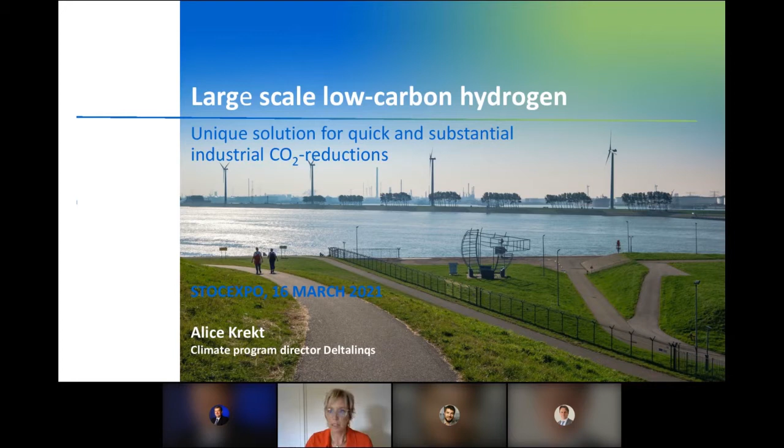So let's start my presentation, because the Dutch government, I'm sure you're aware of that, is very ambitious when it comes to achieving the climate goals. And what you see here in this slide is what we need to do. The aim is to decrease the CO2 emissions, but we need to decrease them quick. And therefore we have this H-Vision project. You can decrease CO2 emissions by making more renewables, but in the short term, it will not decrease the emissions so quickly.

Maybe just to step up to the question that was made in the previous speech. You have, of course, renewable hydrogen made from wind energy, for instance, it's an ideal situation, or solar developed electricity. You can make from water H2 and O2, so you then have very clean hydrogen, no CO2 emissions, at least at the production site. But you can also make hydrogen another way, and that is the way that we want to produce it. And we call it blue hydrogen.

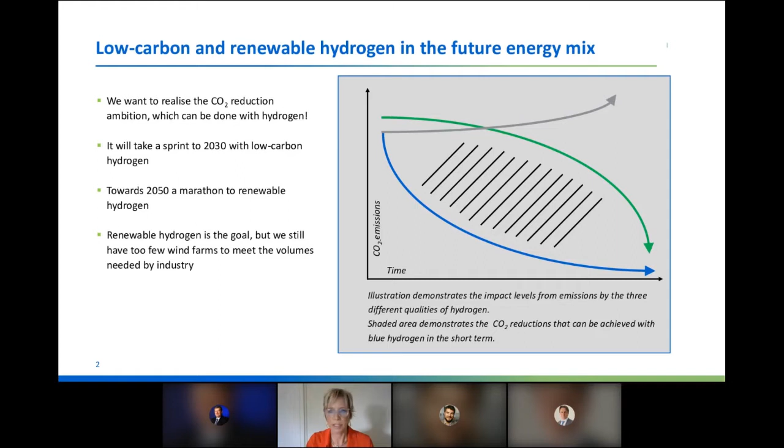You see here a blue line, and we think with this blue hydrogen, you can more quickly decrease the CO2 emission. I don't know if my pointer can be seen, but you see the lines here; this prevents a sort of bathtub of CO2 emissions that will still be emitted if you use the green line and slowly decrease the CO2 emissions. So that's why we have this project in the Port of Rotterdam, and I will explain quickly about it, and later on Marcel van der Kar will explain his interest from the Vopak side, because it's also of big relevance to the transport sector, or to the storage sector.

Here you see a picture that was already presented in a more beautiful way by the previous speaker, so I can be brief about this. But we think hydrogen will be of major importance for the European economy and the European industry, and all these purposes were explained earlier on.

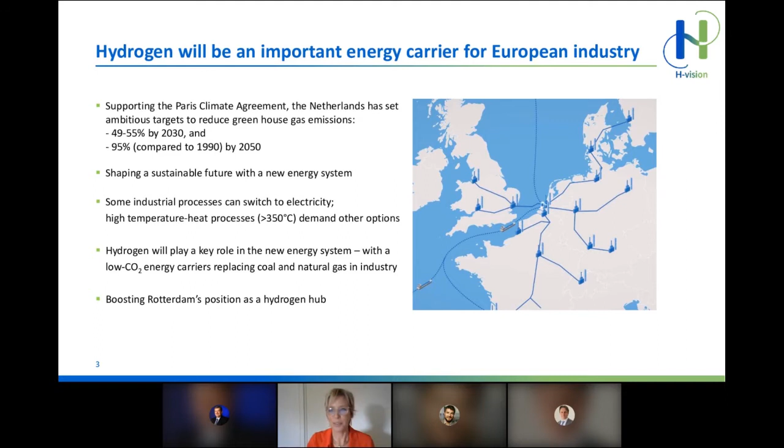But maybe one thing to say, for the Port of Rotterdam, to be more specific: we calculated that now about 0.4 million tons of hydrogen is used, mostly in the refineries as feedstock, but we think it will be 50 times more in the Port of Rotterdam area, because we want to import it and use it in all these several ways. So we are really focusing on it very enthusiastically, so to say, because we also see it as an opportunity.

We have a short movie that will explain very well, I think, what the project is about. So I hope that the organization can start this movie.

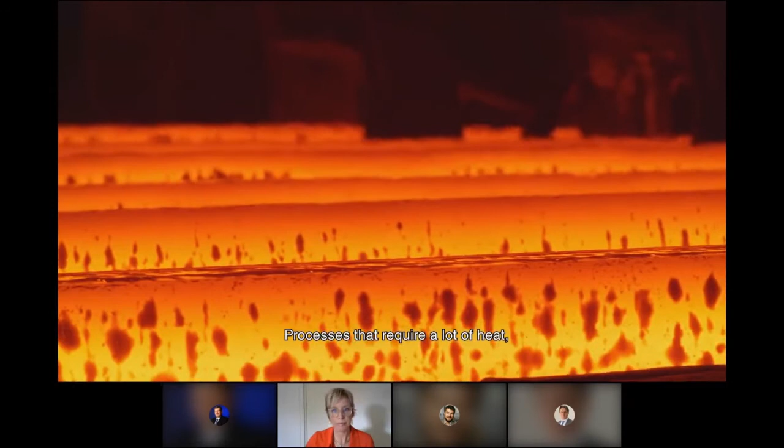In order to comply with the terms of the Paris Climate Agreement, the industry in the Netherlands wants to significantly reduce its CO2 emissions. Processes that require a lot of heat will have to switch from fossil fuels to hydrogen. This means that in order to achieve the climate goals by 2030, large quantities of hydrogen will be needed in the short term. This is possible with H-Vision. H-Vision has designed a unique and distinctive process in which hydrogen is primarily produced from refinery waste gases. This works as follows.

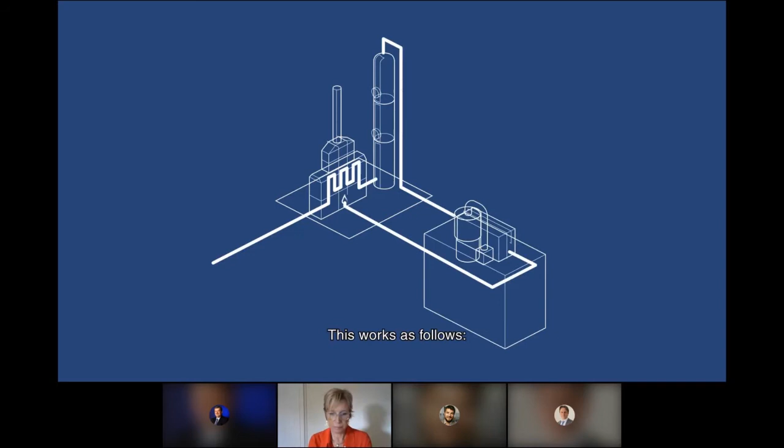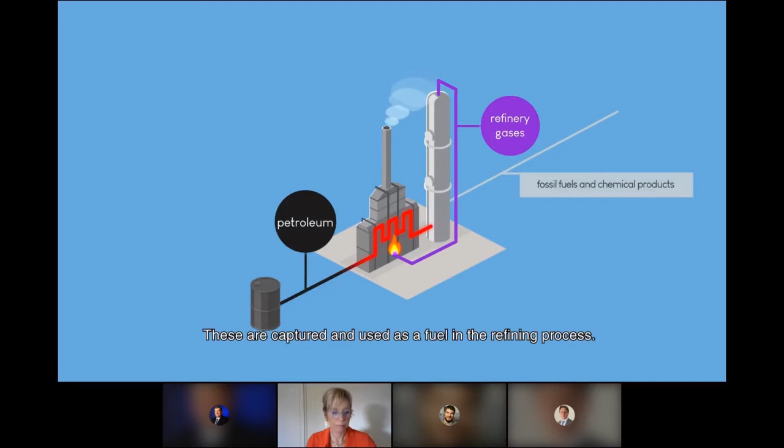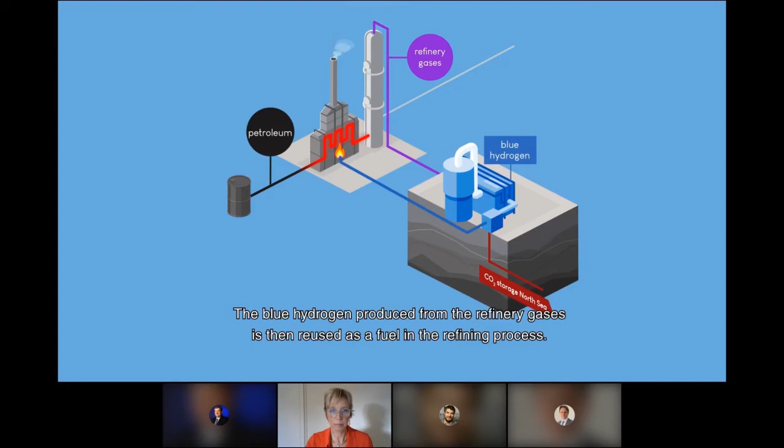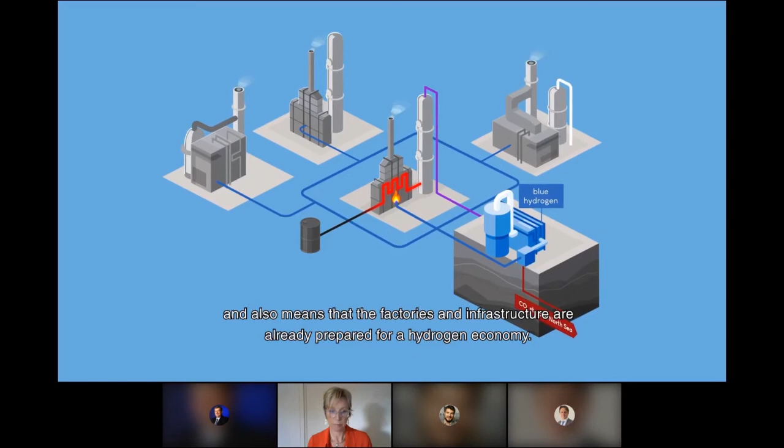Gases are released during the refining of oil. These are captured and used as a fuel in the refining process. CO2 is released when these gases are burnt. H-Vision transports these refinery gases to a central location where they're used to manufacture hydrogen. The CO2 released during that process is captured and transported to depleted gas fields under the North Sea. The blue hydrogen produced from the refinery gases is then reused as a fuel in the refining process. This significantly reduces the CO2 emissions from the refineries affiliated to H-Vision, and also means that the factories and infrastructure are already prepared for a hydrogen economy.

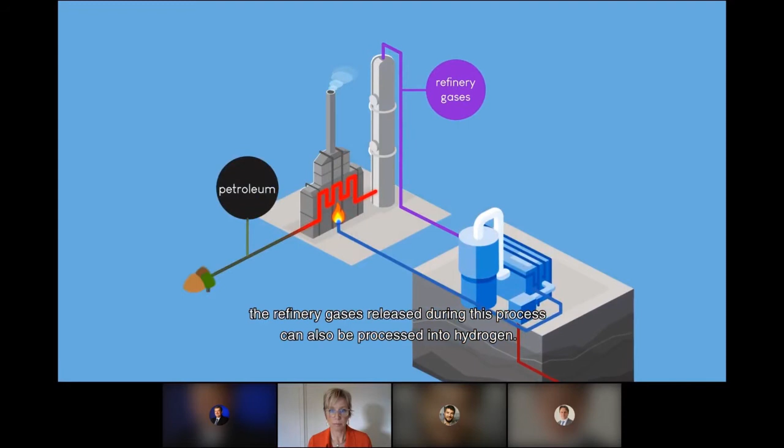H-Vision's hydrogen production is based on proven technology and can therefore be scaled up to an industrial scale and deployed in the short term. In the longer term, H-Vision will continue to contribute to a climate-neutral energy system. H-Vision is ready for the fuels and raw materials transition in the chemical industry. If the sector switches from petroleum to biogenic raw materials, the refinery gases released during this process can also be processed into hydrogen. In fact, this would even lead to net negative emissions in the production process. Once the use of green hydrogen has expanded, H-Vision can be deployed to make up for wind power shortages during periods where there is less wind.

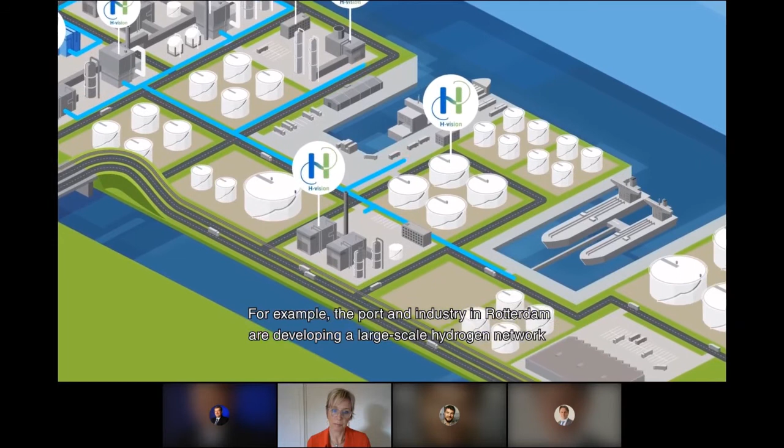The development of a hydrogen system is a joint task, both in the Netherlands and in Europe. A large number of partners in the hydrogen value chain have joined forces in H-Vision to initiate this process, but there is always room for even more customers. H-Vision partners also collaborate on a wider scale. For example, the port and industry in Rotterdam are developing a large-scale hydrogen network throughout the port complex, and H-Vision is preparing to connect to the national hydrogen backbone. This will transform Rotterdam into an international hub for other countries in northwestern Europe. H-Vision will ensure that the industry can quickly achieve the climate goals.

So I think an image, or a movie, can say more than 1,000 words. You can look at the movie later if you want to, but this explains a lot. It looks very simple if you look at this movie, but there are some challenges that we face before we can execute the project and start with the building of the factory. I will dive into some of the details.

First, maybe it is important to say that we have a large group of companies and organizations through the whole chain of hydrogen development connected to our project. Port of Rotterdam, you see, is important because they have the land position in the port of Rotterdam. Gasunie does the transport of natural gas in the Netherlands, but also the 3 refineries, because we want to start with the refineries as a kickstarter for this project. Of course, the transport and storage sector in Vopak. So there are a lot of organizations involved, and of course, we try to keep all these interests that organizations have, and also the economic challenges that they face when you develop this.

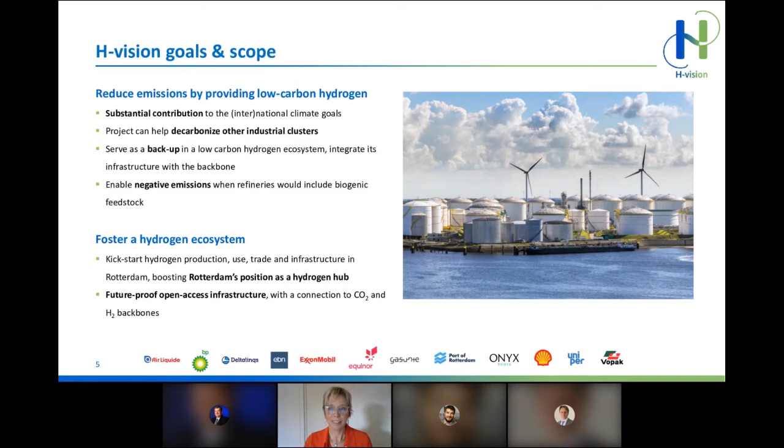We try to combine this into the project. Maybe just more detail about the technique, because it's a proven technology, but there's one very special thing about it: we use refinery fuel gas that's emitted from the refineries. Of course, they have a sort of leftover which they now use as a fuel. We will use it to produce the hydrogen, and that is important. In that sense, you make it almost like a sort of circular project.

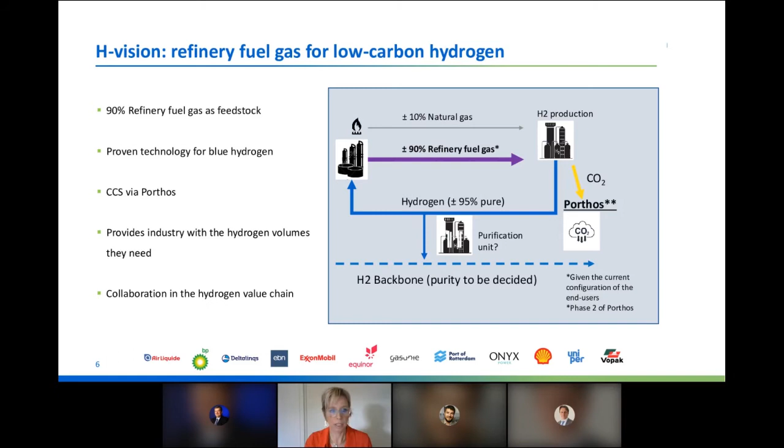And in the Netherlands, also in Rotterdam, we have a CO2 storage project offshore, which is developed as we speak, and we'll be an important client for them. And in the movie it was also explained that we have a link towards the big backbone that is developed at the moment. So if you look at the project, it is a major important one also for the Netherlands.

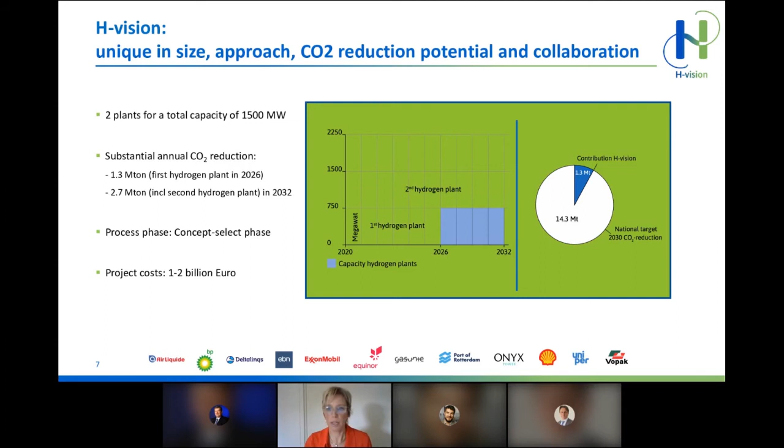Here in this picture, you see the complete amount of megatons that we need to diminish in 2030 as an industry in the Netherlands, and the contribution of H-Vision is 1.3 megatons before 2030, because then we build our first hydrogen plant, and the second hydrogen plant will increase it even more. So after 2030, we have 2.7 megatons of CO2 reduction. Of course, we kickstart the hydrogen economy also in the ports because we enable the industry of the infrastructure.

But it's not as easy as I explained it and as it is said in the movie, because there is still a financial gap in the project. So we are looking for the sources and the subsidies also to support this project. It will not be a cash cow for the companies that are connected to it and that will build the factory. But of course, you need to make a break-even project, and that's not the case yet.

The infrastructure is a slow development. We have a lot of discussion with the government about where the pipelines will be, and when to start with the backbone. So I think we have an urgent issue here that the infrastructure needs to be developed quickly in order to support this project.

And maybe more to say in general, this is a one-of-a-kind project. It's technically not so complex, but it is one of the first of its kind in the area, and it has like 5 core partners and 6 supporting partners. You need to combine all the interests, and that is a challenge in the business case as well. So maybe that is to start off with.

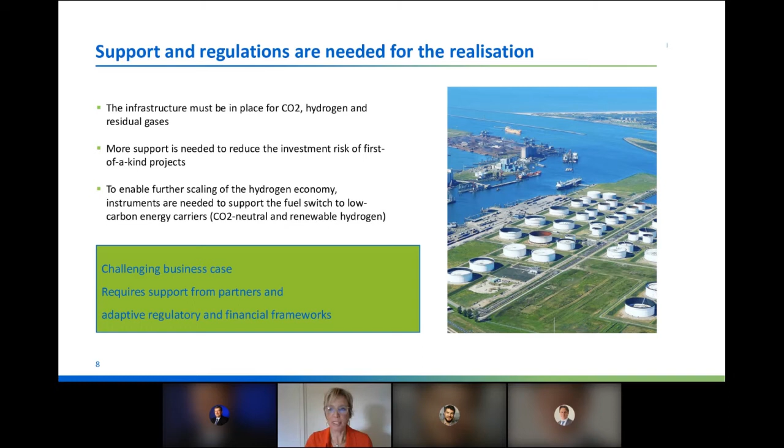And of course, I'm a director and trying to talk to the government as often as I can about these topics, and they give us a hearing ear, so they are in favor of this project and helping develop it. So I'm very positive that we will end with a successful business case and a positive project. But let's first listen to Marcel, what he has to say from the storage side.

Yeah, thank you, Elise, and thank you for the opportunity to speak here as well. Vopak is indeed a part of the 12 companies in H-Vision, and as a storage company, we have a bit of a special role in there. But before I explain it, I'll take you through a few slides to explain what our role is in the energy transition, how we see ourselves, what we think we can do in new energies. And then I'll come back at the end to our role in H-Vision.

So storing vital products with care. That is our motto as a storage company. So we store the products of today's society, the products that are crucial, that are vital for today's society. That's what we do today. And as a company that's now 405 years old, we really like to do that in the future as well. So we like to store and handle the products of the future as well.

And to look at our role in the whole energy transition, we see actually 3 different action lines. The first action line is to reduce our own footprint. If you look at the CO2 emissions of a terminal, we have emissions, but it's nothing compared to the industry around us and the industry that we serve. But we do have a footprint on CO2, and of course also on VOCs. We have clear actions there. And to reduce our own CO2 footprint, one of the things we are doing is building solar parks and using solar foils.

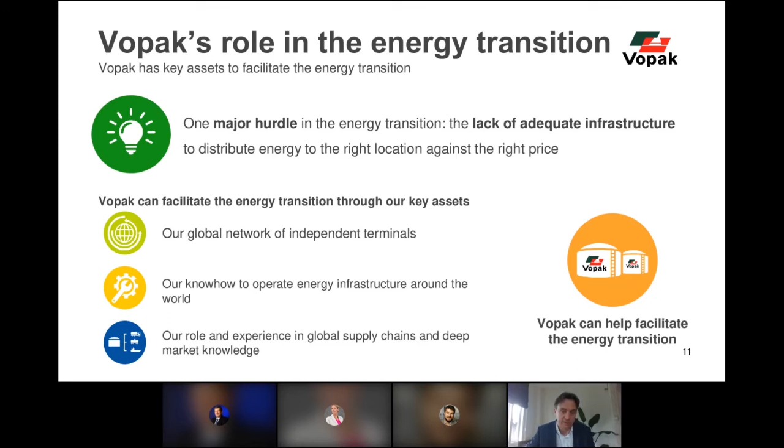And in these new products, in hydrogen, that's actually very much the same. So you also have their demand, there's a supply. It's much more unknown, it's much more uncertain, but it will develop. We have clear confidence in that, and we fully support the slides as also were presented by Alexandru. And as an infrastructure company, as a storage company, we can facilitate and even accelerate the energy transition. And we see that role in 4 different buckets, in 4 different areas.

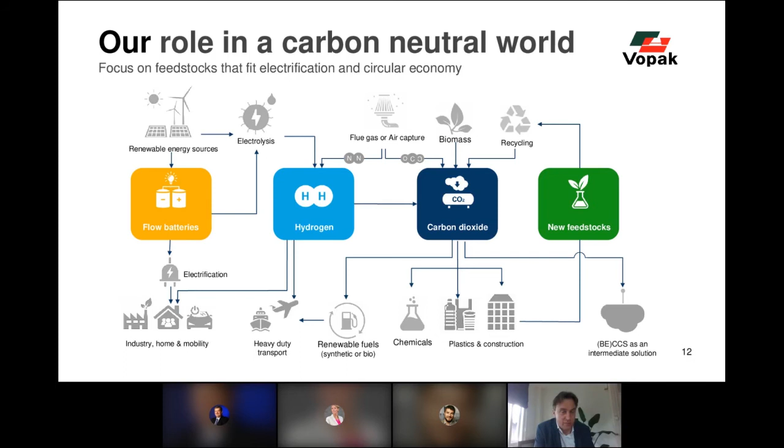The first is hydrogen. The second one is carbon dioxide, so the CO2, the collecting, storage, bringing it to the subsea storage facilities. That is a whole new supply chain that really needs to be developed. The third one, that's the most left here on the picture, is the electricity storage. We see an opportunity there for us as a storage company to store electricity in liquid. So then you have large flow batteries to balance the electricity grid as well. And the fourth area is the new, more sustainable feedstocks, where we see recycling options in the industry, and that will become important in many parts of the world as well.

And then we look at the same areas as already presented before, that you can import it from the south of Europe or the north of Africa or Middle East or Australia or Chile, and you can supply it then towards the larger demand areas like Northwest Europe, but also Singapore, Korea, Japan, and even the United States. So we see a clear role there for hydrogen to be imported.

And if you want to import hydrogen, then you need to, of course, understand how to import. And there are different options, different ways. First, we see the pipeline option. The pipeline connections are possible. You can use the pipelines that are now used for natural gas, convert them into pipelines for hydrogen.

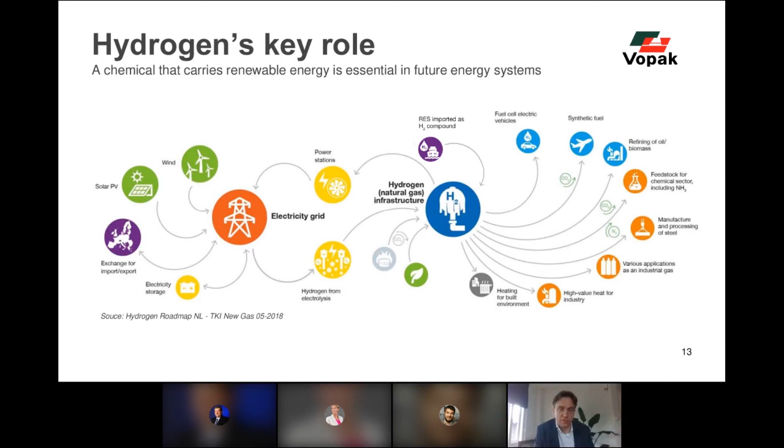And we see those three developments, of course, next to the biofuels connection, the synthetic fuels, and the methanol. But for the real longer future, we see those three as real good solutions. And we are working on projects on all three of them. And then we're importing. But I also already mentioned, we think that we have to embrace all solutions. So also the solution of H-Vision.

And by doing that, you're already setting up the infrastructure that is needed for the future green supplies. So if you then in the future build import terminals in any form, one of the three forms, as I mentioned, or even connection by pipeline, then you can already connect to this system. And then you have already industrial use of hydrogen, of blue hydrogen, and you can add the green hydrogen to it. And you can then further develop the markets.

Because what we see is that there are so many things you need to develop at the same time that it really helps if you can do things in parallel. So waiting for the development of the infrastructure for hydrogen in a port will only delay the whole development. So we say we need to accelerate. So let's do it already now. Let's do it with the locally produced blue hydrogen, really start combating the climate change immediately. So that's the reason why we are part of H-Vision.